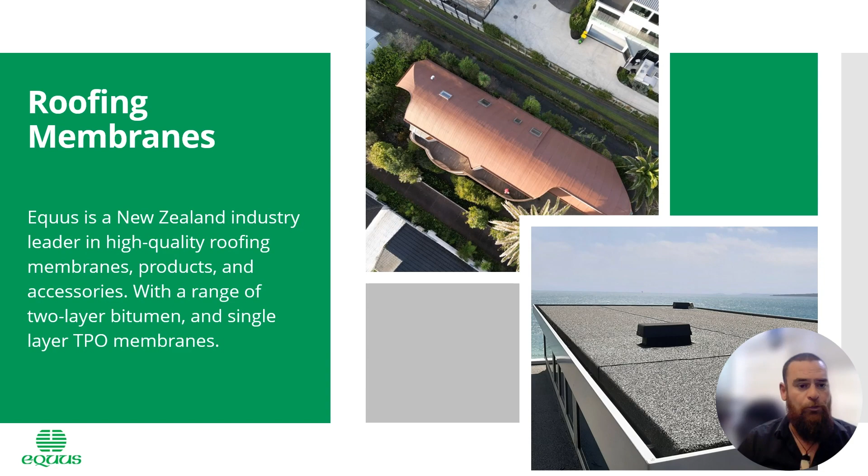A major part of our business now is roofing membranes, and probably one of the things we're more commonly known for within the building industry. We are a leader in high quality roofing membranes, products and accessories, and these range all the way from 2-layer systems to single layer systems to liquid applied membranes, which we will touch on as we go through this. But what I'll do is I'll start on the Equus Soprema Duo.

So previously known as De Boer Duo, this is the most specified and installed 2-layer torch-on membrane in New Zealand. Although it's manufactured in Belgium, it is specifically engineered and designed for New Zealand conditions and UV exposure. Duo has over 90 years proven performance worldwide. Options these days include self-adhesive base sheets, mechanical fastening, root-resistant cap sheets for green roofs, that sort of thing.

It's an SBS modified membrane with very high quality bitumen, giving it good elasticity and movement capabilities. A life expectancy of approximately 35 plus years in New Zealand, which is the highest of any membrane on the market. I make note of independent testing by SGS because I don't want you to think this is some marketing or sales pitch. This is in-depth testing done independently from Soprema or Equus.

One of the key features or benefits of the Duo, it is a high quality, high end, it is our Rolls Royce as we call it, 2-layer system. Every square metre is warranted for 25 years and has a 20 years insurance backed warranty from the manufacturer, so from Soprema. We're also very proud to say we now have our CodeMark certification for 1 degree pitches in the Duo if your design calls for that, as well as Duo's fully BRANZ appraised and has been for many, many years.

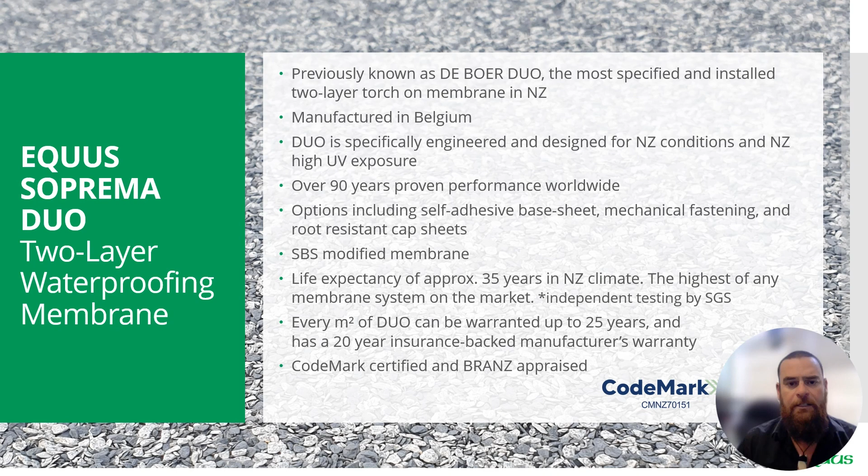Then we move to the Soprema Nova SK. So this is our 2-layer flameless system, manufactured in Italy with over 40 years proven performance. Proven history on the New Zealand market, although it was only acquired by Equus Industries in 2021. This was again with the De Boer buyout from Soprema. This has now come under the Equus umbrella and we are the distributors of the Nova SK.

So it's a 3mm base sheet and a 4.5mm cap sheet, which is very similar to most 2-layer torch-on systems. It's a flameless installation, so we've got no torch, no naked flames on site. Again, SBS modified, so very high quality membrane, standard 20-year Equus product warranty. This is also CodeMark certified and BRANZ appraised.

Then we move on to the Equus Soprema Soprasun 2-layer. So this is our equivalent 2-layer membrane to most of the other 2-layer systems on the New Zealand market, where Duo sets itself above the rest with its quality and performance. SK is still very high quality. Your Soprasun is a high quality system but at a better price point, APP modified like a lot of the other membranes in New Zealand, so very comparable. Again, this has a proven history in the New Zealand market, although only acquired by Equus Industries in 2022.

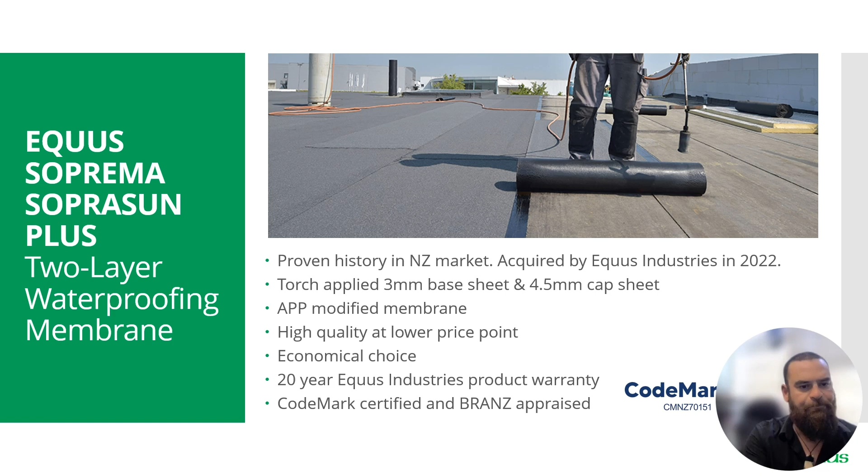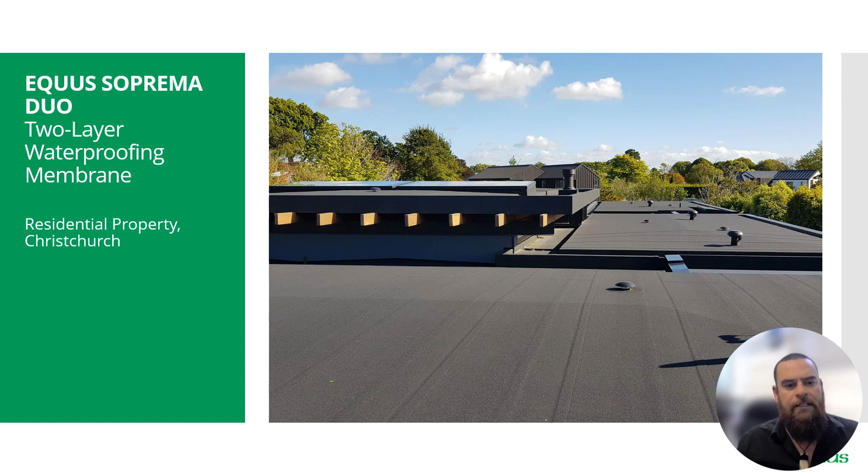So while Equus has been a 2-layer company historically, once we got into membrane, that's sort of where we sat and what we did for the New Zealand market. There is a whole sector of the New Zealand industry now wanting to go back to single layers, your TPOs, that kind of thing. So this is where our Equus Soprema Flagon TPO system comes in.

So TPO stands for thermoplastic polyolefin. New to Equus Industries and the New Zealand market, our brand, in 2021, but has had years of proven performance worldwide throughout Europe. It's single layer with proven resistance to in-depth and prolonged UV exposure, far exceeding the industry norms we have. Again, a flameless installation as it's installed with adhesive and hot air.

So all laps and detailing are vulcanised together with hot air, meaning there's no glues and lap tapes used in laps and upstands. It's a very economical choice and comes with a 20-year Equus Industries product warranty and is BRANZ appraised for use in New Zealand.

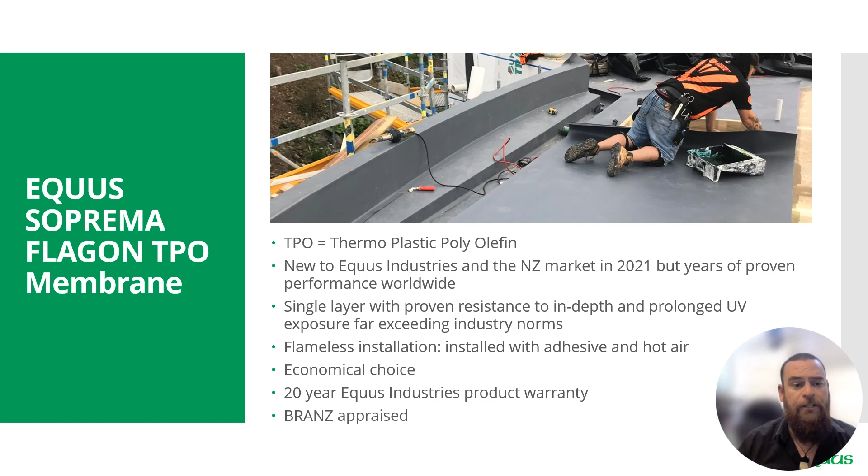Then we'll move on to warm roofs. So again, this is a very brief overview of what we do. We are available to come in and see you or your firm one-on-one, or do a Zoom or a more product specific presentation. Again, I'm just passing over things, letting you know what it is we do, what's in our arsenal and how we can help you.

So warm roofs, a robust waterproofing membrane. We have options combined with thermal insulation, which is going to provide you the energy efficiency while reducing heat loss throughout the roof and maintaining a constant internal temperature. We're taking the dew point from inside the building envelope to outside the building envelope.

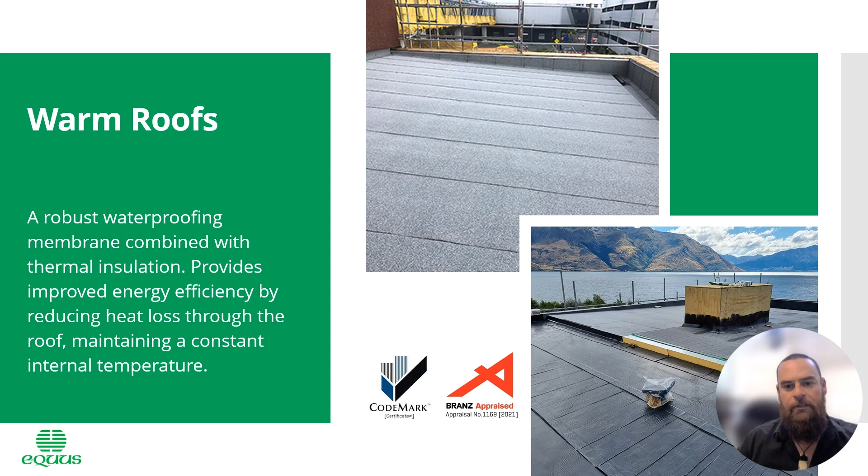So everyone that's watching this will be well aware. If you're not, I'll just touch on it. So the H1 energy efficiency changes came into effect May the 1st last year, 2023. This had significant impacts on the R values required for roofing, walls and flooring insulation.

So residential new builds and commercial builds up to 300 square metres now must perform to an R6.6 across the country, blanket. There's no longer the differing climate zones that we had where South Island, Central Plateau and Northern were all slightly different. It's now 6.6 across the board.

So how can Equus and Soprema assist you with this? Well, what we do is we start with a condensation risk analysis, or a CRA, you may hear them be called. This is a site-specific, project-specific study or analysis done by our engineering team. This is free of charge to you, and this is going to give us an actual R value. It's going to ensure we've removed the dew point with the thickness of insulation we've put in, and it's going to ensure the dew point has been moved.

So we have 4 easy H1 compliant warm roof systems, which I'll touch on shortly. And these range from what you're trying to design and what your budget is for this job to what components we can put in to create this system for you. But it's very easy, and it's a step-by-step process we can do over the phone or face-to-face. So customizable, like I just said, depending on what installation or design you have.

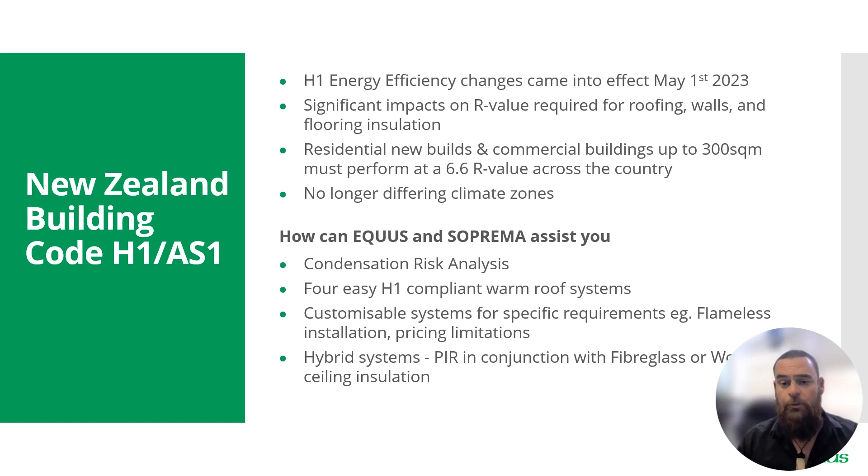And we are able to do hybrid systems. So anyone, of course, can do a hybrid system where we use internal insulation and external insulation. However, testing for these is very tricky. Now, we're lucky with Soprema, we do have the technology now to perform CRAs on hybrid systems to help you make your decisions on how you want this to go.

So Equus Industries was sort of the pioneers in the warm roof system in New Zealand. We completed the first in 2008 with our international partners De Boer. This will be closer to 80% of Equus roofing projects are now warm roof systems. All our warm roof systems are project specific and built to the client's and architect's needs. They're all fully engineered by qualified engineers to ensure the condensation risk analysis, wind uplift and detailing exceeds all needs.

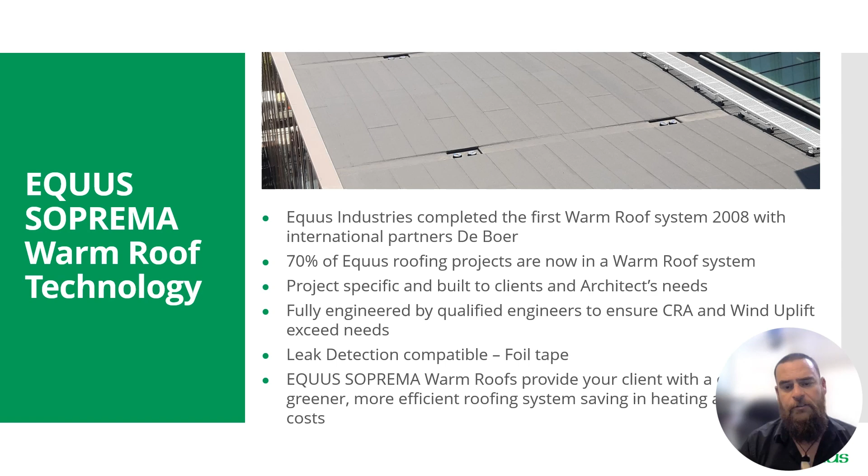Very important to mention here, all of this is free of charge. If you specify and work with Equus, we will do all the technical, all the engineering behind the scenes to create your system free of charge to you and your client. All of our systems are leak detection compatible, and Equus Soprema warm roofs are going to provide you and your client with a cleaner, greener, more efficient roofing system and saving in heating and cooling costs year round.

So a bit about our Equus Soprema H1 compliant warm roof options. So we have Duotherm, Novatherm, Sopratherm and TPOtherm. Now they all sound familiar because I've just been through the membranes with you, the Duo membrane, the Nova SK, the Soprasun and our TPO. The therm is for the insulation component of the system.

So technical support to assist your design, I sort of touched on a bit of it, will be engineered and proven with a project-specific condensation risk analysis. Costing options for all projects and budgets. We do all the hard work, and this is what I was trying to say, why they're easy H1 compliant options is we want to take the hard work and guesswork away from you. It's very easy to over-specify or worse, under-specify a warm roof.

We have full building consent packages available. Simple click of a button on our website or a phone call, email, we can have you a full building consent package for you to review and attach to your documents. And again, I mentioned technical support is all free of charge to you and your client.

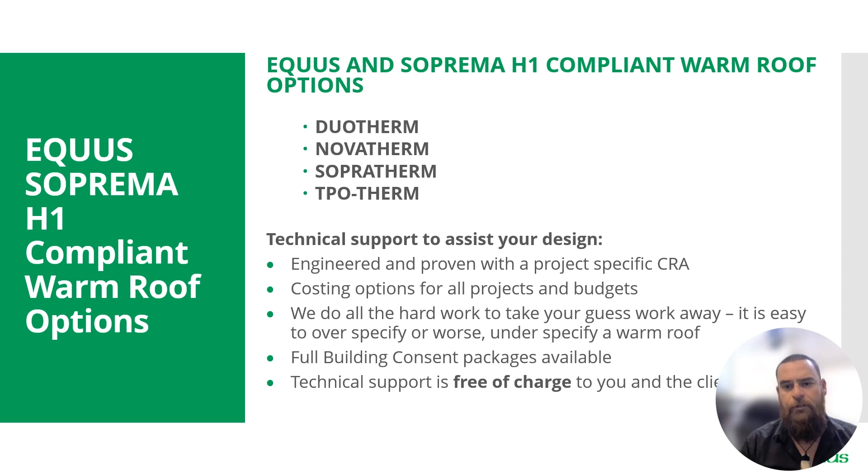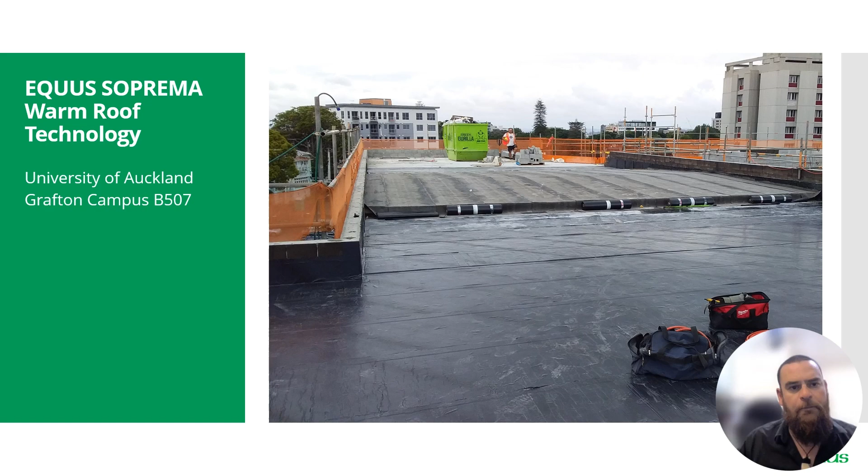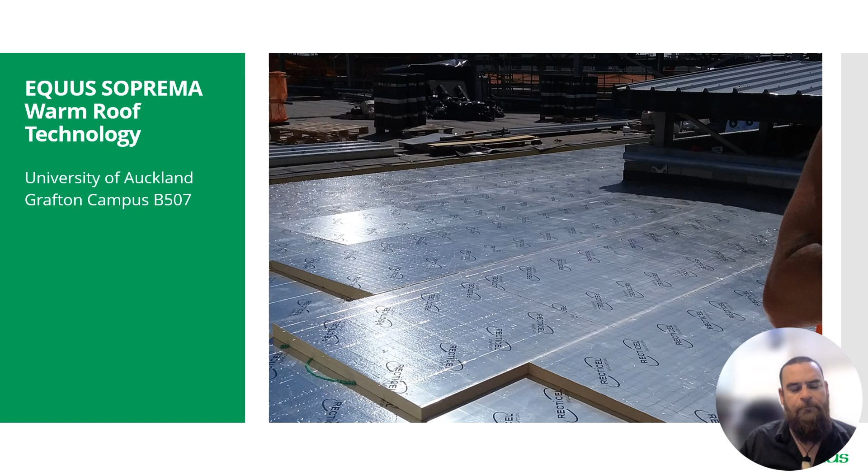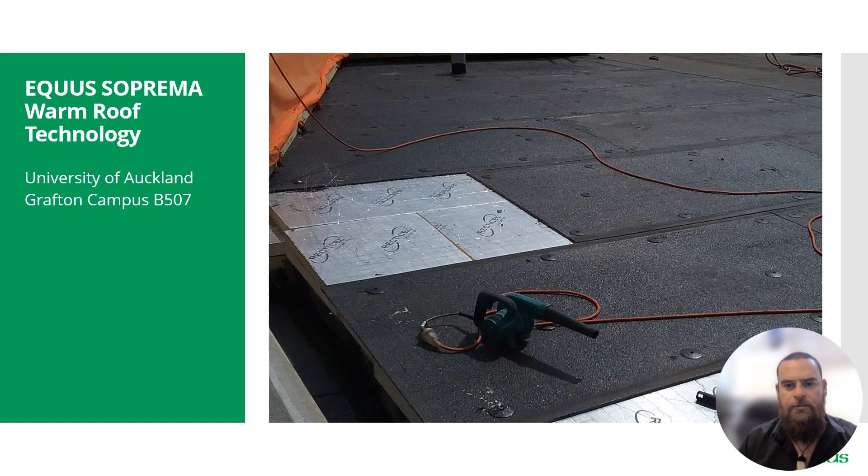Here's an example of a warm roof being done in Auckland at the Grafton campus, the B507 building. So here you'll see the vapour barrier being installed, followed by the insulation. This was a 2-layer insulated roof at this stage. Now, depending what you're doing, this is deemed as a high traffic area by students, so a roof board was installed as well. We do have these options within our warm roof systems for whether it be for traffic, acoustic, fire ratings. We can assist by adding or taking out different components. And then it was finished with our Duo.

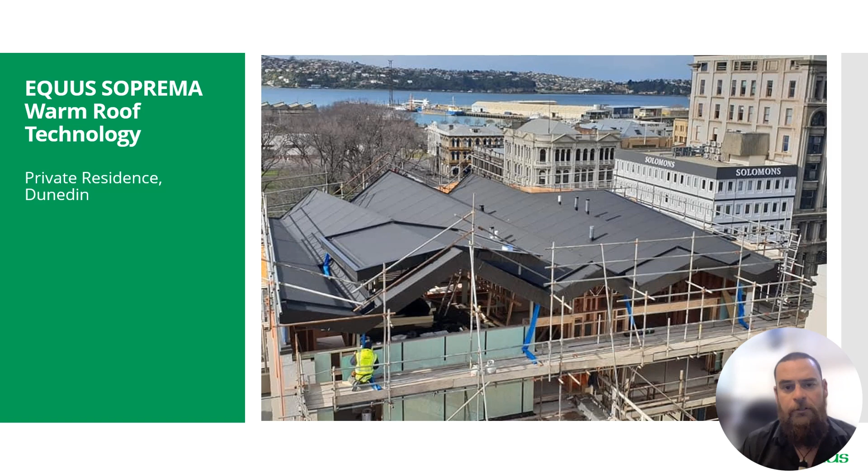Here's another one I was involved with actually. So this was actually on Grand Designs, and we were lucky enough to get involved at sort of the 11th hour when they realised the design and the existing system was going to play havoc with what was going on. So we got involved with the local contractor and a builder, came up with this, got in touch with the architect, we worked together and we ended up creating a really high performing, great looking roof in the centre of Dunedin.

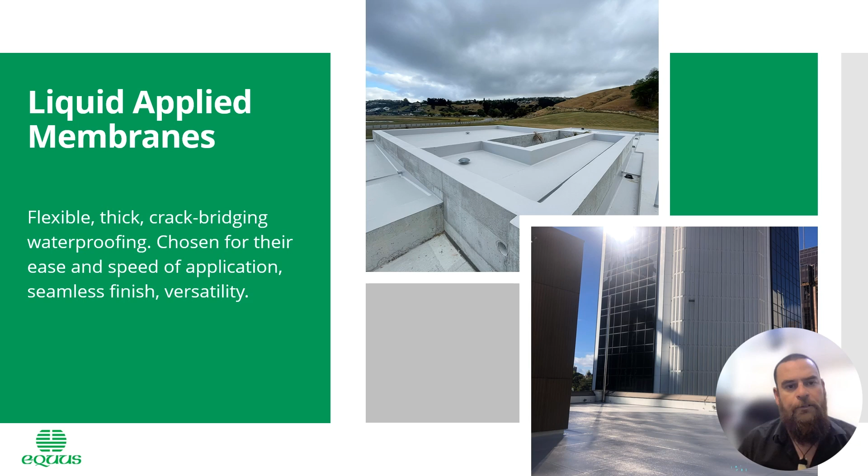The chances are you've seen this on a balcony or on a roof somewhere throughout your time. Incredibly UV resistant. As I said, we made it in New Zealand for New Zealand. Easy application and maintenance, customisable top coats to match any colour chart. Great solution for complicated detailing where sometimes sheet membrane can be very tricky. Dex is simple. If you can get a brush around it, you can Dex around it. 15-year standard Equus product warranty. However, recoating specification available to extend warranties.

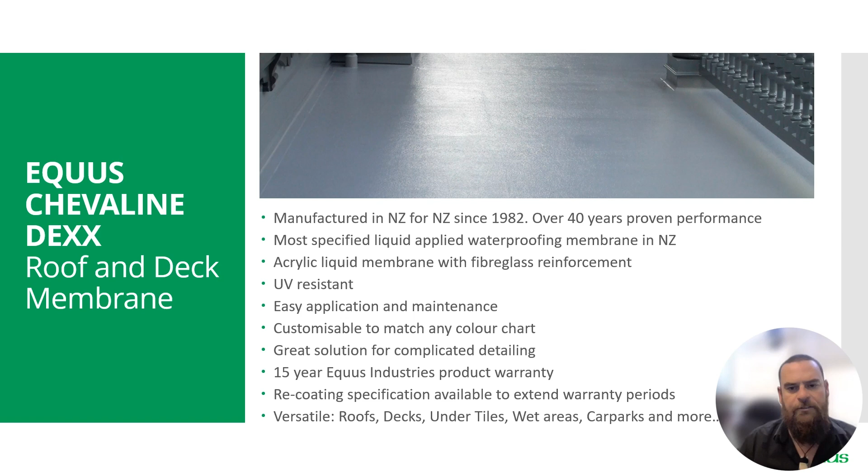The other option is in 15-20 years, your roof's a bit tired, your balcony, we can come, look at it, best case scenario, clean it, repair any damage, recoat it, start the life cycle again. And again, versatile, roofs, decks, under tiles, wet areas, car parks, the list goes on.

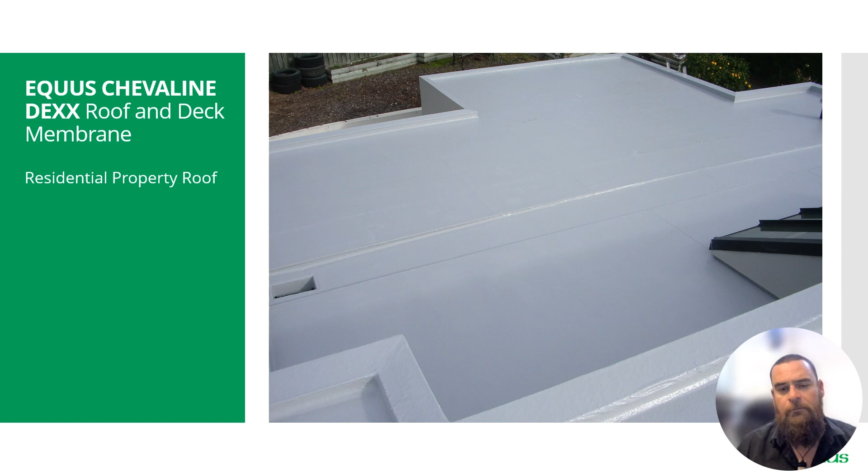Here's an example of the Chevaline Dexx being used on a roof. So as you can see with the detail of this gutter there, a sheet membrane would be incredibly tricky with your laps and folds. With the Chevaline Dexx being seamless, it takes away all of those areas, and there's now no water ingress points whatsoever because of laps or anything like that.

Decks can still be direct stuck to with tiling, it's a bit old fashioned now. With new codes where we have the bigger threshold heights, pedestals have really come in, so that's where we prefer to go. However, if you're doing a retrofit, repairs or renovation, we can still do it. We still have the specifications and can warrant it as a direct stuck system.

And car parks, so we have a range of car park systems. I'll actually touch on them soon, briefly. The Chevaline Dexx also has a specification for a car park finish.

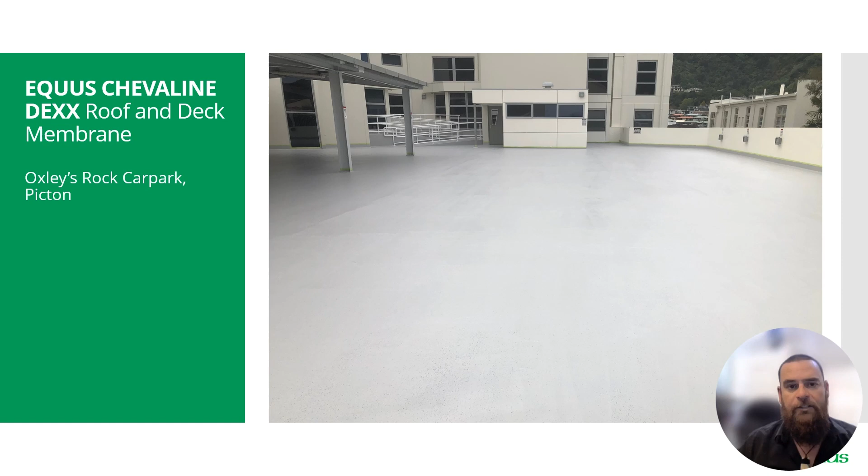Then we've got the Equus Soprema Easy Flashing, another liquid waterproofing membrane. This stuff is pretty incredible. It's a Soprema product, unlike the Dexx that is made by Equus in New Zealand. This is a water-based liquid applied bitumen membrane for repairs and detailing. It's very watertight, ponding resistant, has really good adhesion and elasticity, which I'll touch on in a second, resistant to aging and UV, easy to apply, and can actually be applied to damp surfaces.

And this is the amazing thing, the good adhesion I mentioned - it adheres to metal, concrete, insulation, bitumen membranes, rubber membranes, glass, plywood and more. Very crack resistant at low temperature and drip resistant at high temperatures. Product warranties are available depending on the application, what we're doing, and what top coat we want to finish with.

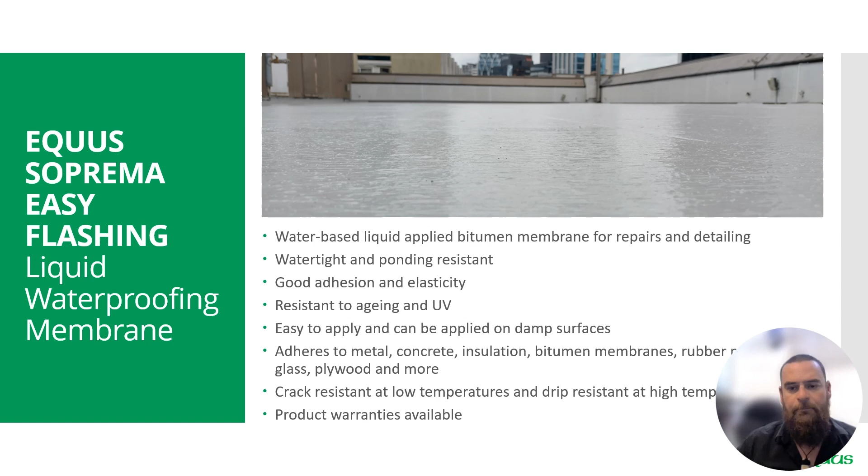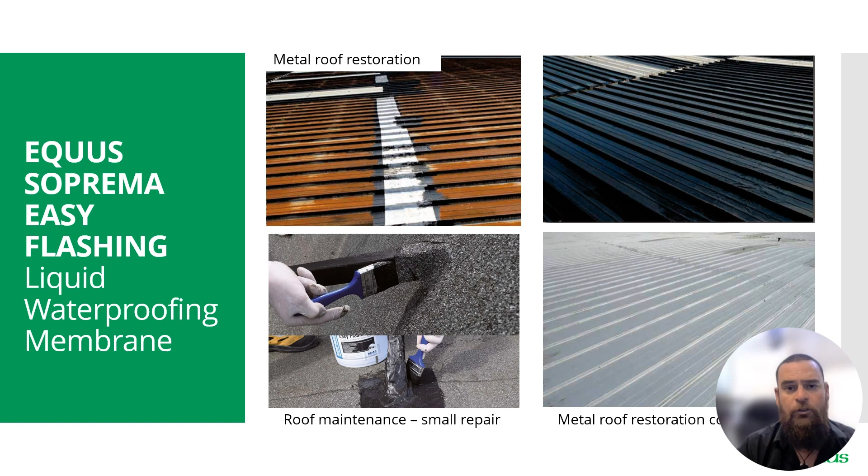Here's some examples of the Easy Flashing being used to repair a metal roof. The clients didn't have the budget to replace their whole roof, so we came in, repaired areas where we really had to with some tape, got a couple of coats of the Easy Flashing, and then put a zinc finish over it. So it looks really good, and this will put another 10 to 12 years up the sleeve of the client before they need to re-roof.

So then there's underground waterproofing, a very big part of our business as well, like the roofing membranes. We are involved in high performance waterproofing membranes designed specifically to perform underground, ensuring protection of a structure's foundation. Loose laid, self-adhesive and torch on, as well as liquid options are available within our arsenal.

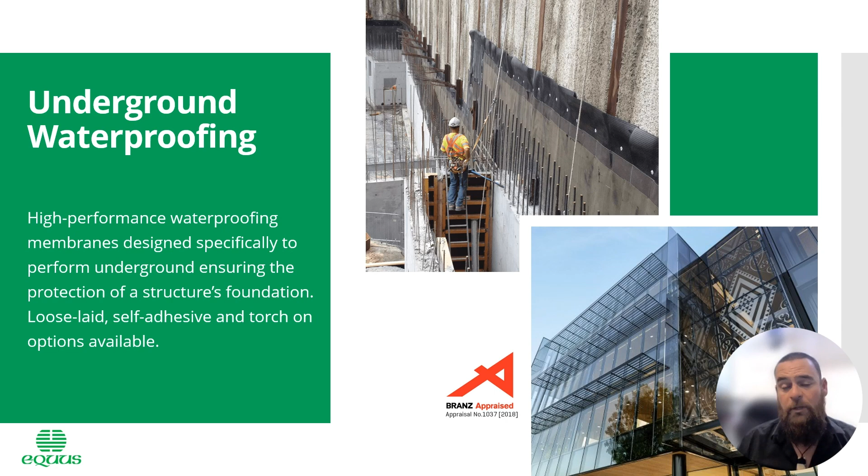So a bit about the Equus Soprema Colphene systems and the benefits. The application, the horizontal surface doesn't have to be 100% dry or clean. We can go on compacted hard fill, sand blind, or site concrete. We sweep it clean so there's no big rocks or things there to puncture it. Essentially any weather we can lay the horizontal or under slab application, so it's a very quick horizontal installation time. There's a special duo selvage to protect thermal insulation.

So back to the H1 requirements - the issue you used to have with horizontal insulation or any torch on insulation is you were heating your laps, and you need to heat these well because that's your security from water ingress. What it was doing was melting, or close to melting, the insulation underneath. The two options now are you can put your insulation on top of the membrane, or use the duo selvage, which means the selvage edge or the join, the lap, is 50% peel and stick, so that closes, and 50% heat. So then it's closed, it's protected the insulation underneath, which is more and more prevalent on site now, and we can close the lap with a confident finish.

Increased flexibility at the laps due to the SBS modified bitumen. As mentioned, all bar one of our bitumen systems are SBS modified, which is the highest modification we can do. Heat welded watertight laps resist pedestrian site traffic from other contractors.

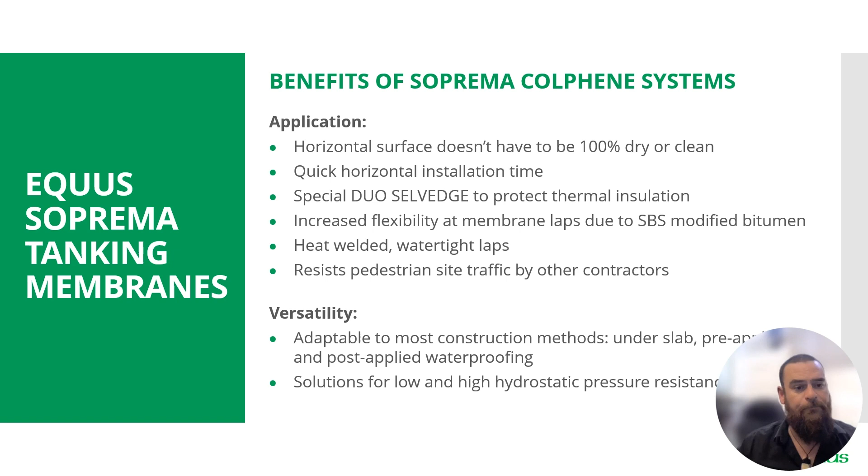So some more benefits is the performance, which is what everyone's really concerned about - the applications on our guys, it's the performance and what you're paying for, what your client's getting at the end of the day.

Adheres to reinforced concrete floor slabs, meaning it resists soil settlement and dimensional movements. Where some membranes are placed on the ground with the building on top, there's still kind of a no man's land between your site slab and your building. The Colphene systems have a thermal chemical reaction where they adhere to the bottom of the slab of concrete, meaning it becomes one with the structure. So if the building moves, the membrane moves with it—it's not stuck in between the site slab and the building, not knowing which way to go.

Copes well with unexpected weather conditions. Being a simplistic bitumen-based system with heat involved, we're not so reliant on the weather as some other style tanking membranes around the globe. And once again, less influenced by groundwater once installed—no reliance on pressure or curing. Once it's on, it's set, it's done.

Lightweight membrane for wall waterproofing, and it's a complete system with its accessories and typical details. Single component liquid waterproofing for pile penetrations, pipe penetrations—very safe and very simple to do.

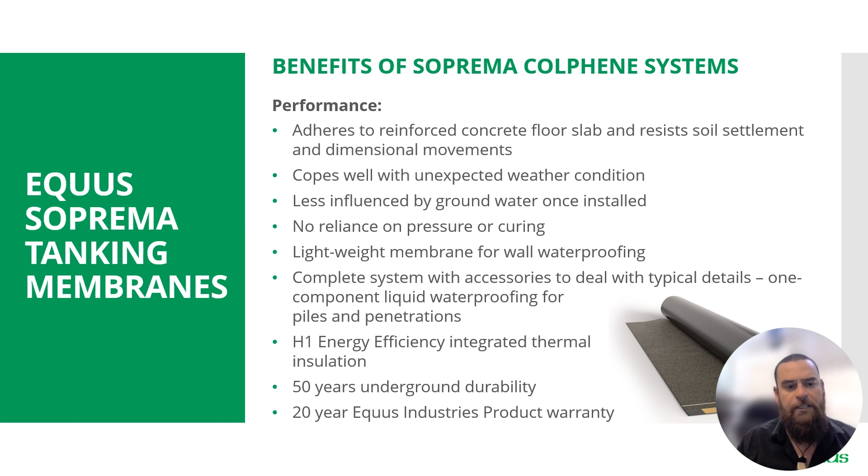And it can be incorporated, as I said, with the DUO Selvedge into the H1 energy efficiency requirements for your underslab or wall insulation. It's got its 50-year underground durability and comes with a standard 20-year product warranty as well—the Colphene BSW with the DUO Selvedge. It's designed to be used on or under insulation, giving a 100mm wide lap rather than the traditional 80mm. That allows a 50 peel and stick, 50 torch on or hot air. What this does, as I mentioned earlier, protects the components under the membrane from any flames or hot air.

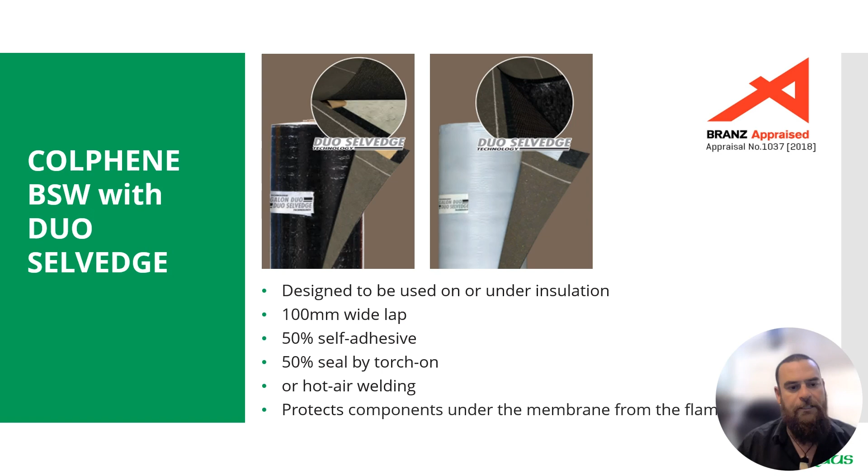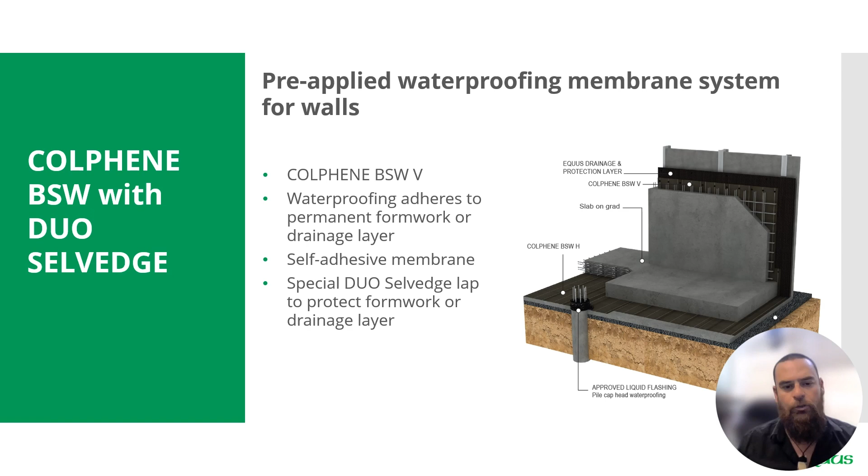So, pre-applied waterproofing membrane systems—this is our Colphene BSW-V. As I mentioned before, for underground it's BSW-H for horizontal, Colphene BSW-V for vertical. Waterproofing adheres to the permanent formwork or drainage layer. It's a self-adhesive membrane and again has that special DUO Selvedge lap, so we can protect what's under it but still ensure we have a really tight, good lap in this waterproofing.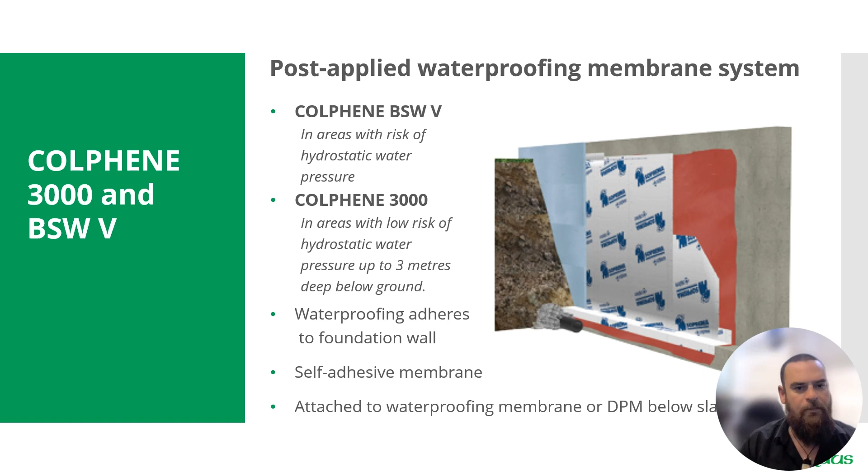Then we've got some post-applied waterproofing membrane systems—again the Colphene BSW-V, as I just mentioned, for areas of high hydrostatic pressure. When we're coming out of the ground up to 3 meters maximum and deemed lower hydrostatic pressure, we can move to the Colphene 3000, which is the 1.5mm version of these bigger, beefier bitumen membranes. This is your 1.5mm peel and stick.

So here's some examples of some tanking jobs we've done. You can see this goes under slab and pops out, and then down at the bottom there at that right angle, the walls come down and back out onto its horizontal membrane. This is Deboflex, which has been superseded by the Colphene BSW range.

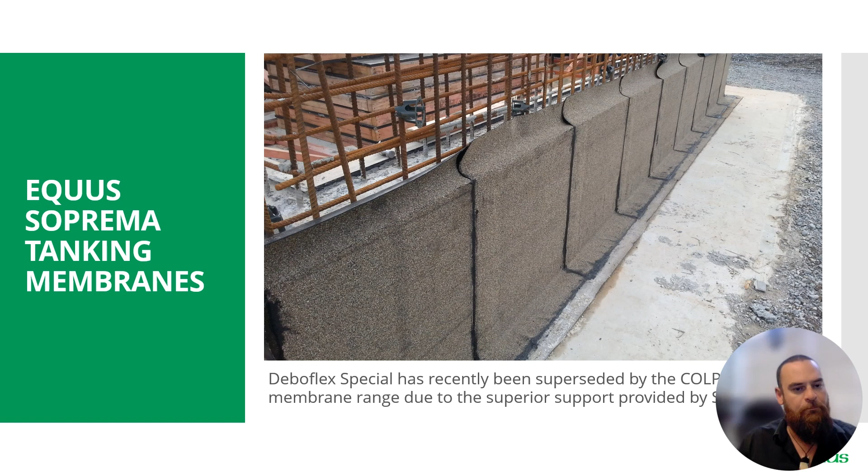The Colphene 3000 tanking system—what sets it apart: one, it looks pretty cool if you look at those photos, but two, it's superior flexibility, puncture resistant, high tensile strength, and has self-healing qualities. So great for vapor barrier behind walls, great for tanking, great for vapor barriers on roofs, as it self-heals a lot around these fixings.

So fully self-adhered, flameless installation, 1.5mm thick, BRANZ appraised. Now this is BRANZ appraised as a tanking membrane, not a damp-proof membrane. I say that because the majority of the 1.5mm peel and stick membranes on the market are BRANZ appraised as damp-proof membranes, DPMs. We are BRANZ approved for waterproofing membrane, WPM—appraised for low hydrostatic pressure with a full suite of details. Compatible with Colphene BSW underslab, so if we used the BSW-H underslab but your walls were deemed not to have that much hydrostatic pressure, and didn't need to go with the BSW-V, we can combine Colphene 3000 and BSW-H. And of course, a 20-year Equus warranty.

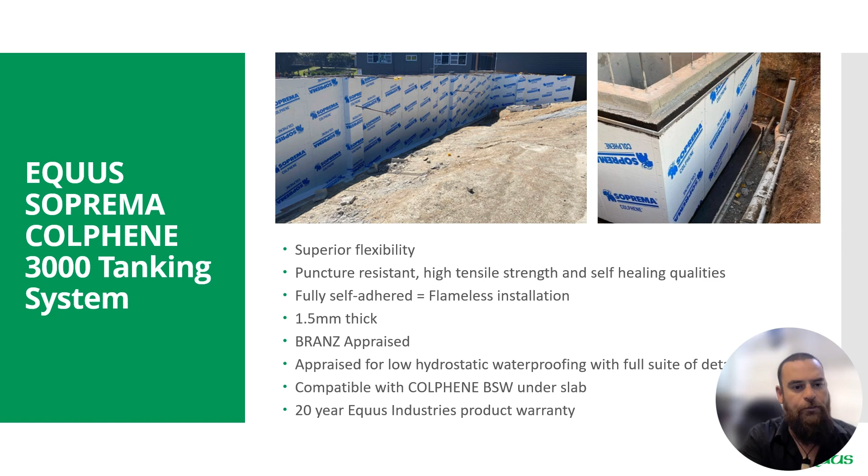Some options—so this is a Spark building in town. This was a very in-depth tanking system. As I mentioned the roof before, the tanking was very interesting as well, and came out really good.

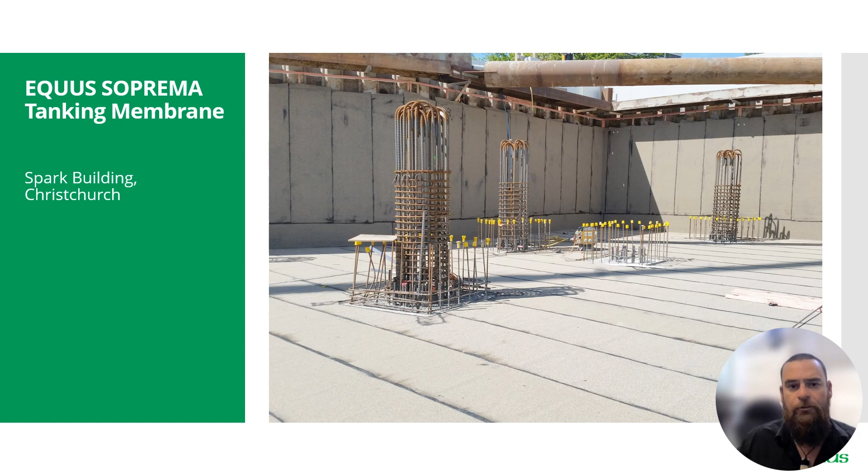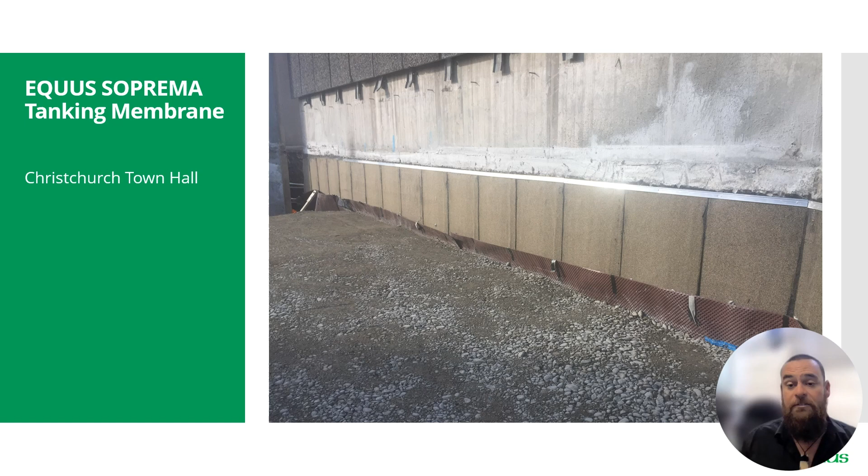Christchurch Town Hall rebuild—this was a very incredibly in-depth job, the retro rebuild of the town hall, getting in under that structure to ensure it was watertight. And happy to say, no water ingress whatsoever in the last 8-9 years since we finished it.

The big one that everyone knows about, the Metro Sports facility. This was, at the time—I believe there's one in design now—the largest tanking job in New Zealand. We were lucky enough to get it across the line and install the Equus Soprema waterproofing systems.

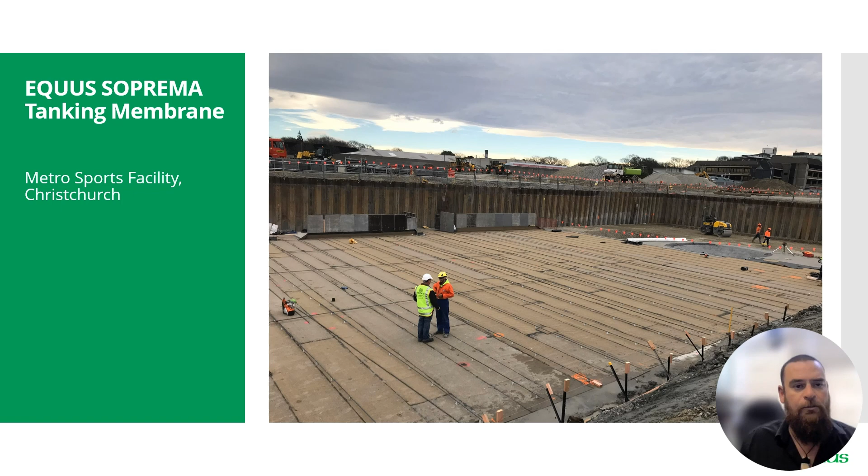Then we go on to coatings. As mentioned, we were predominantly a coatings company—that's how we started. Then we moved into waterproofing membranes a few years down the track, but coatings is still a big part of our business. It's what we're passionate about. We have chemists and engineers at the head office and labs that design and create these systems for the New Zealand market when the need arises. Hence our huge range, as over the years specific requirements for coatings have come up and our chemists have been able to create products for this. So still a very important part of our business.

External weatherproofing or waterproof coatings with easy cleaning, chemical and graffiti resistant properties, texture coating, full crack repair and remedial systems available. Our specifications are engineered specifically to the client's requirements.

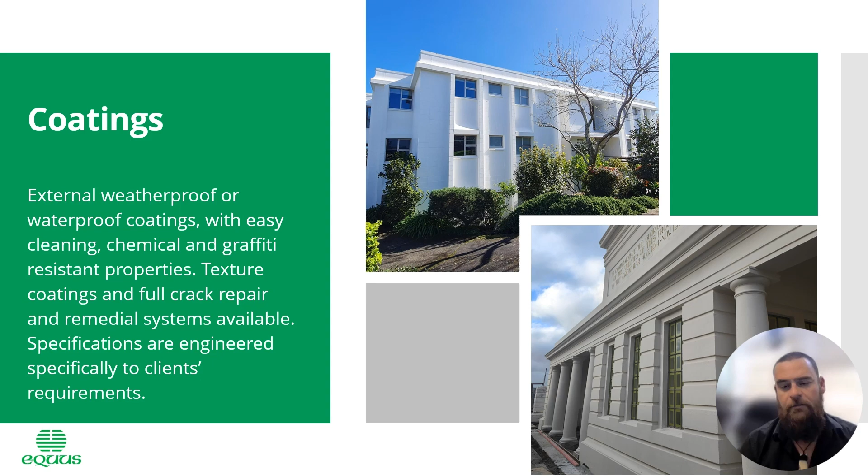I won't touch on them too long because I could talk for hours on Equus coatings and paint systems, but in short, exterior high build coatings.

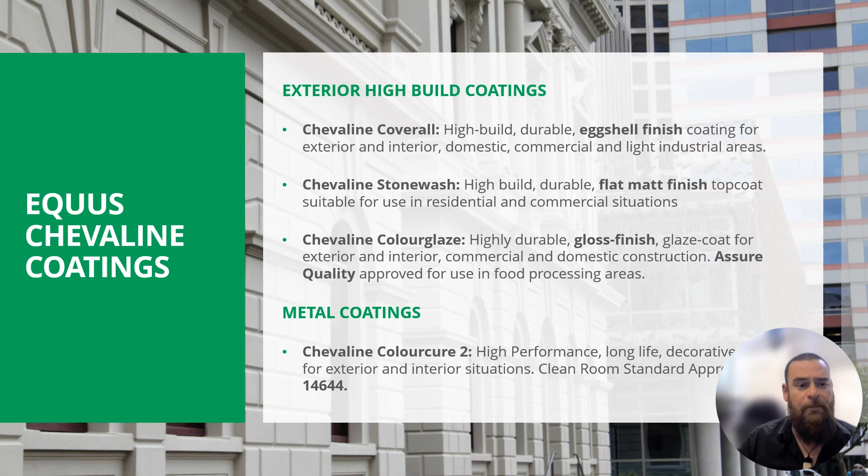Your metal coatings, the Chevaline Colourcure 2, which is really high performing and also has its clean room standards. A lot of these systems we do in the dairy industry are predominantly Equus paints throughout New Zealand and Australia. Then you move on to Equus Keim coating.

Keim is an international partner of ours, and this is a specialist mineral paint used a lot on heritage projects around New Zealand.

Your Keim Granital is a sustainable waterborne liquid silicate exterior paint with a matte finish for any mineral substrate. What's important is these are breathable paints, so for your old concrete heritage structures, the Keim will protect, but at the same time allow this concrete to breathe and dry out. The Concretal Lasur is a low pigmentation mineral matte finish, and this can be adjusted to get any kind of finish on any kind of substrate.

And then your Keim Lotexan, which is a water repellent. You don't see it, and it ensures that we don't get moisture coming into the pores of your building.

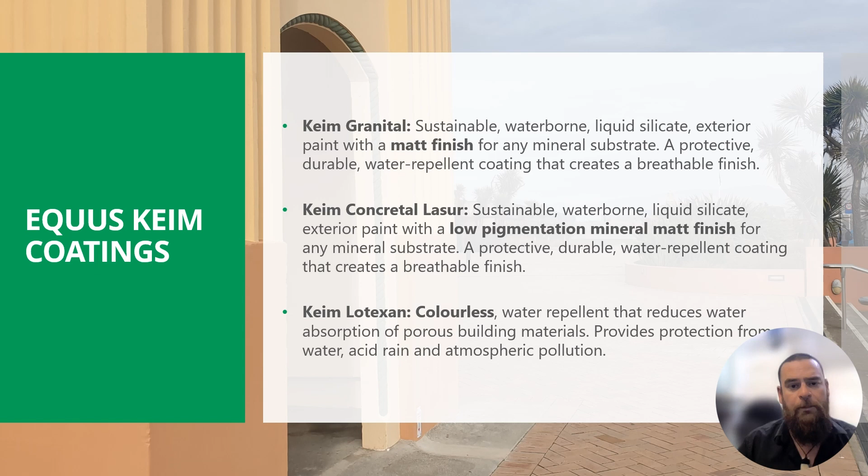So hygiene and agriculture coatings. As mentioned, we do a lot within the hospitality, health and dairy industry within New Zealand, and we've got specialist solutions for a variety of situations in dairy and agriculture, with specific systems designed to provide easy to clean, pollutant resistant finishes in all areas of processing plants and dairy sheds.

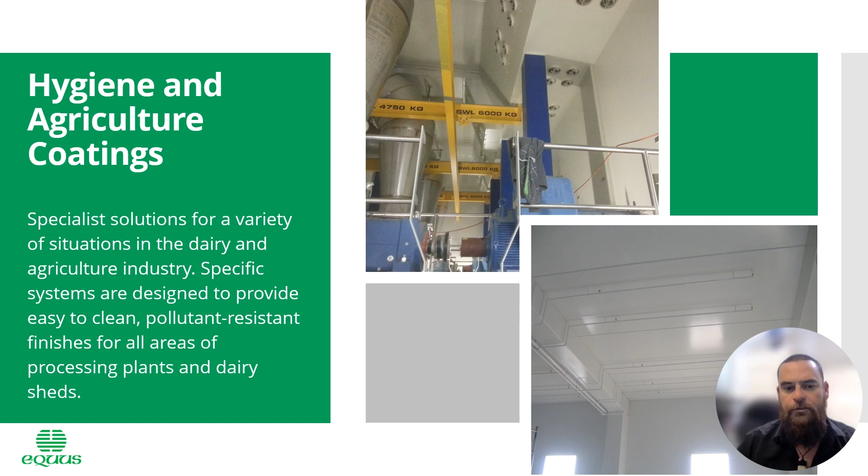As you can see here, Edendale Dairy Factory, as well as all the other ones around New Zealand, these are covered in Equus paints inside and out, and generally have Equus waterproofing on them as well.

Flooring is a part of our business we're again quite passionate about. We have professional floorers, incredibly experienced within our industry, and we have a range of flooring options from your changing rooms at the local rugby club to a kitchen at the hospital to the floor in your winery, for example.

A range of epoxy and polyurethane floor coatings providing easy clean, hygienic, chemical resistant, medium to heavy duty floor finishes. We've got our AsureQuality certification and Clean Room Standard 14644 approved systems, with standard colours and colour matching available.

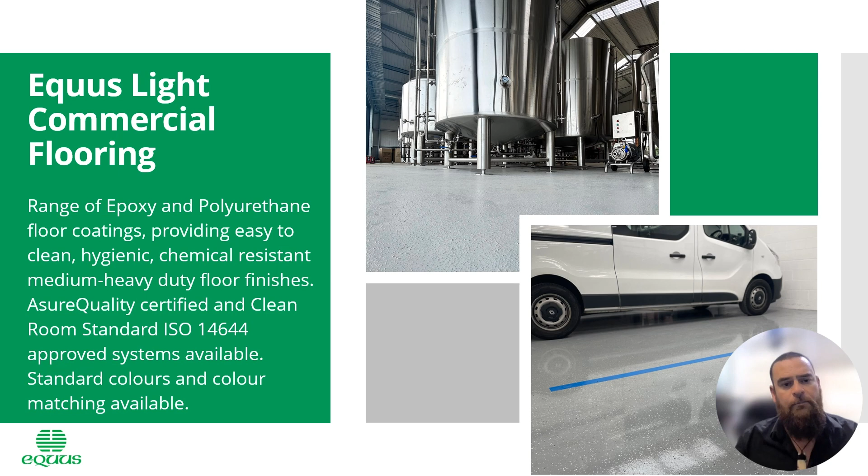So industrial flooring - the first thing we do when you come to us with a floor is we'll ask you questions. What's the intended use? What's the size? What's the finish you're after? What's the cleaning regime? What sort of chemicals are going to come into touch with it? And then what's the budget your client has?

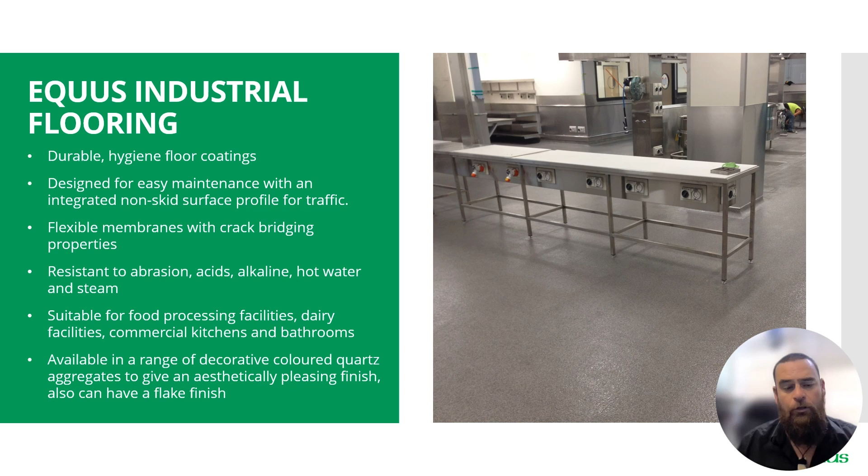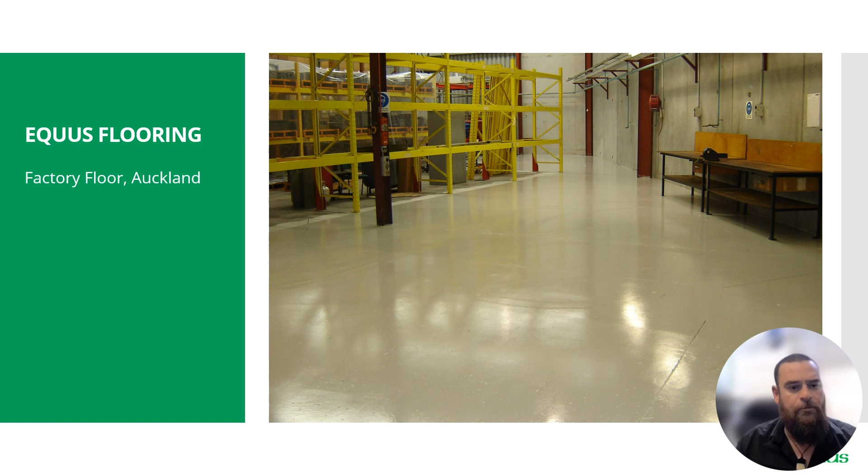So we go from industrial flooring, which you'll see in industrial kitchens and the like at stadiums, hotels, hospitals, to factory floors. A simple EpiStix Rapid system, which is a two-part waterborne epoxy - mix it up, roll it on in a couple of coats, very high end. This is done in airport hangars, workshops, ablution blocks, you name it.

More Equus floors - Synlait Dairy Factories done again in the EpiStix systems, to a hospital kitchen floor, again done in a Duracon. This is a more aesthetically pleasing, hard wearing, easy cleaning system.

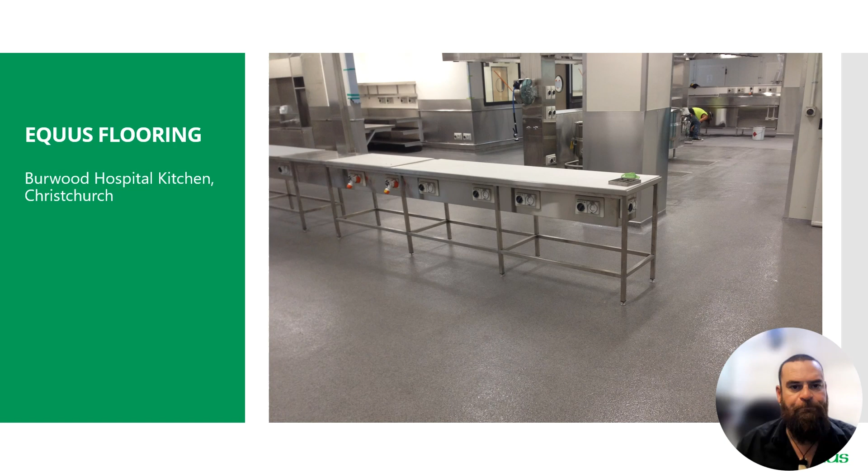Then car parks. So under flooring comes our car parks. We would be a New Zealand leader in the car park game. There's a lot more competition out there now and options for you, but one of the ones that has always stuck ahead of itself is the Matacryl system that Equus provides to the New Zealand market.

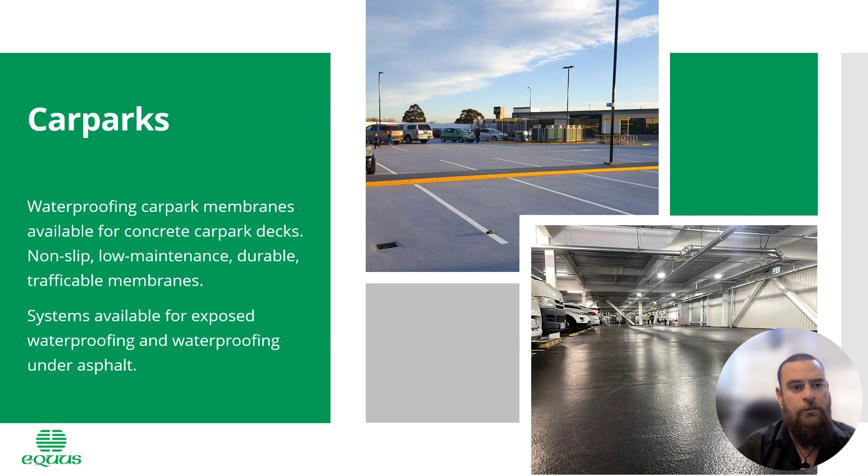So here you'll see the Hub Hornby car park - this is in Matacryl, so all the paint you see is Matacryl. This is a non-slip, easy to maintain, fast system with great crack bridging capabilities and very hard wearing for vandalism, that kind of thing.

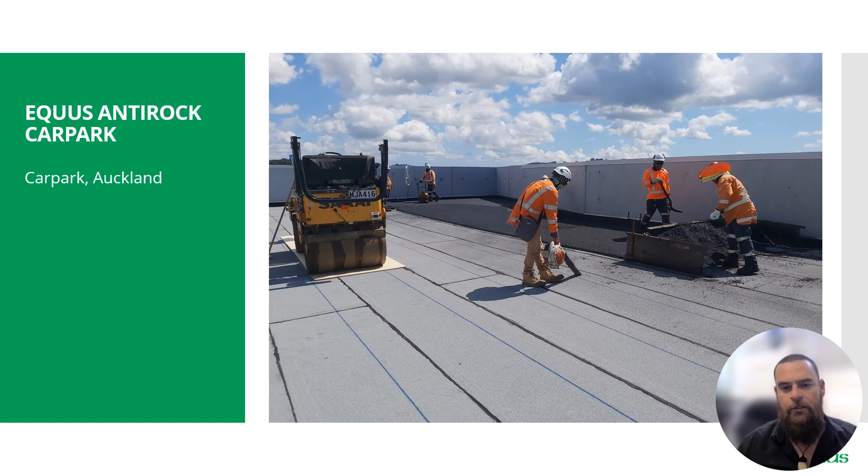And the other version is the under asphalt. So if they're not going for a concrete painted finish and they want an asphalt finish, Equus Antirock, which is a thicker single layer torch on, gets applied first to primer on the substrate, and then hot asphalt is rolled and applied on top. So we're waterproofing underneath the asphalt rather than coating the top of the concrete for waterproofing.

Now the thing that sets us apart: I've given you a brief overview of systems and products that Equus supply, but anyone's going to do a webinar or pop into your office and talk about products they supply. What sets us apart is our technical support. We provide it free of charge, as I mentioned, throughout the whole process. We just need to start the conversation, and then we'll help walk you through it. We'll take away the boring hard stuff to leave you with the more exciting, aesthetically pleasing parts of your design.

So for specifications, of course, you can find us on MasterSpec, ArchiPro, Archify. We have a range of standard specifications, both Equus specs and MasterSpec specs, and we can adjust and make project specific any specification at the drop of a hat. Work sections available on MasterSpec: you'll see we've got our Duo roof and deck membrane, the Duo Therm roof and deck, the Nova SK, Sopra Sun Plus, Soprema Colphene tanking systems, our TPO systems, our deck systems, and our fixed plus deck and tile support, which is our pedestal system. So these are all available. They are very easy to change, or you can click support and one of our technical consultants will be in touch to help you through the process.

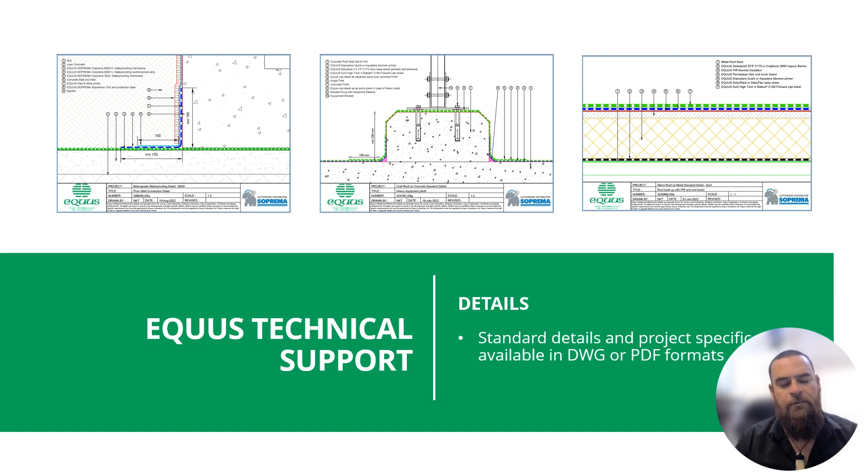Technical support, quality assurance and inspection. So we're not just membrane peddlers. We turn up. We're not just trying to sell the product. We're going to come to site, work with our certified applicators at different intervals, sign areas off, inspect areas, get photos. At this time we can help with detailing. Things always pop up on site. Equus stands alone with its on-site technical support. We don't have one technical rep running around. Every person within our company is either a tradie or ex-tradie and highly qualified to come to these sites and do these quality assurance sign-offs and inspections with the builders, the clients and our contractors.

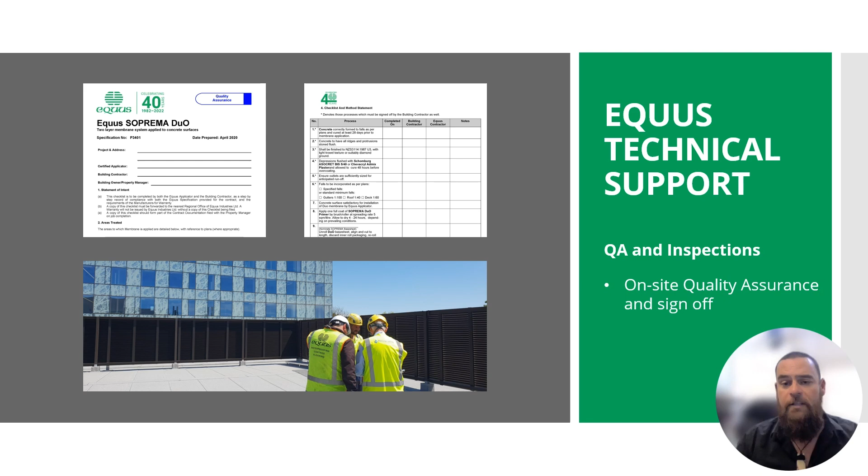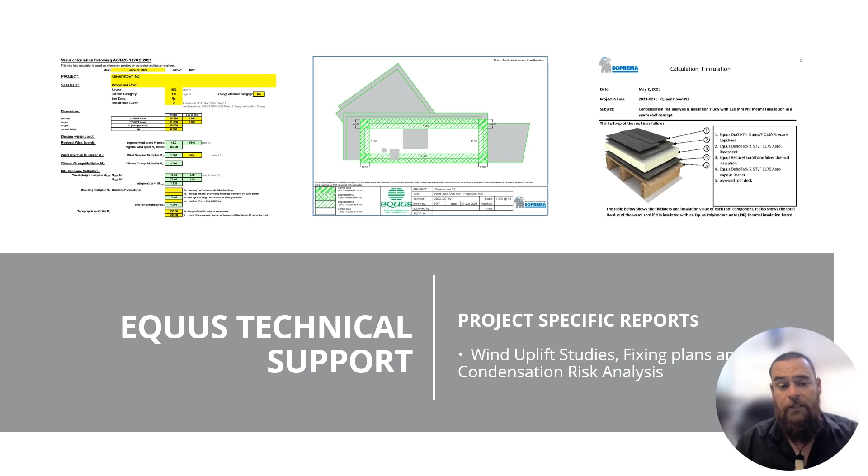Look, that's it from me basically. I appreciate you listening. I know I probably drone on a little bit. I'm not sort of made for these webinar things. I prefer face-to-face or that kind of thing.